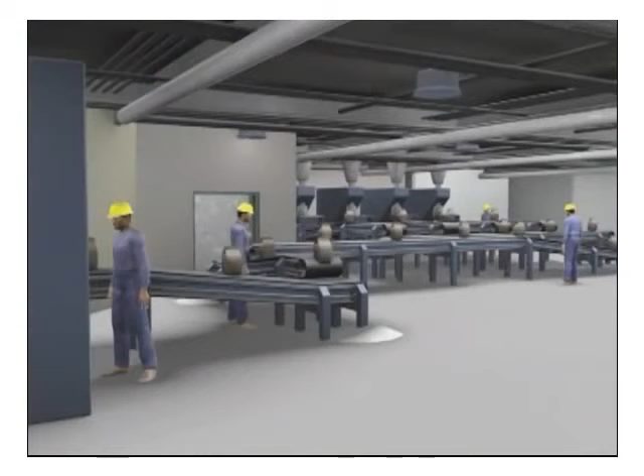Imperial Sugar's sprawling Port Wentworth complex began operations in 1917 and grew to become one of the largest sugar refining and packaging facilities in the U.S. Granulated sugar from the refinery was stored in 3 105-foot-tall silos and then conveyed into packing buildings where it was packaged for distribution. Granulated sugar was also converted into specialty products, such as brown sugar and powdered sugar.

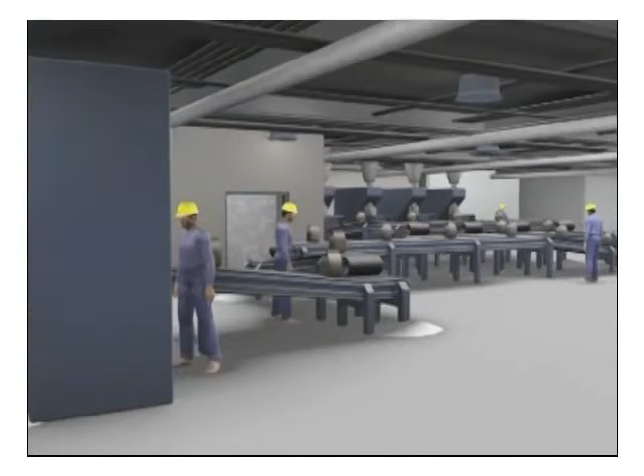Sugar was transported by a complex system of bucket elevators, screw conveyors, and conveyor belts. During this process, sugar spilled onto floors throughout the work area. In places, the spilled sugar was many inches deep. This sugar also contained fine particles which became airborne.

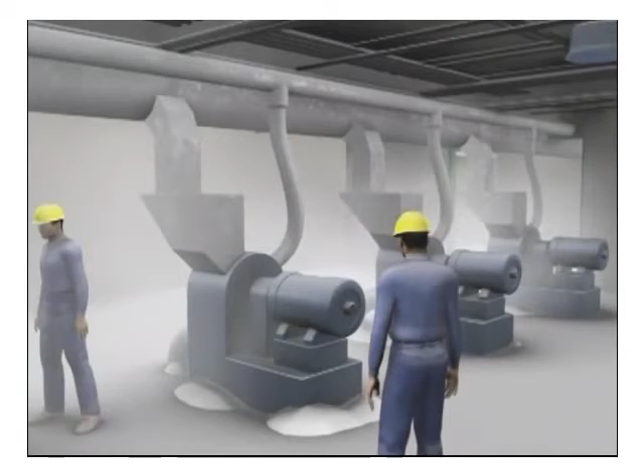In addition, hammer mills were used to crush the granulated sugar into powdered sugar, creating even more dust. The machines were connected to a dust collection system, but it was undersized and in disrepair, and it was not connected to the bucket elevators and conveyors.

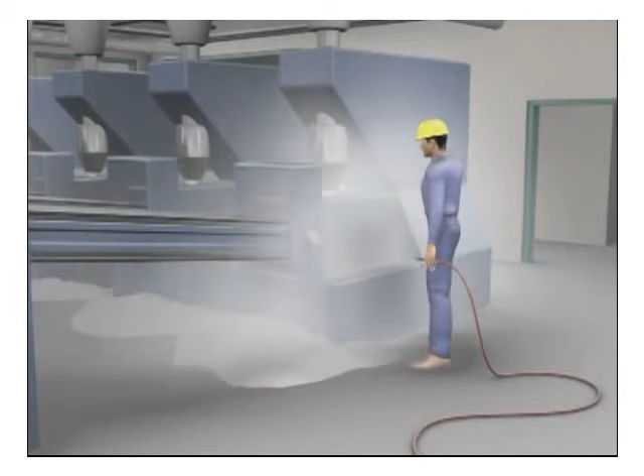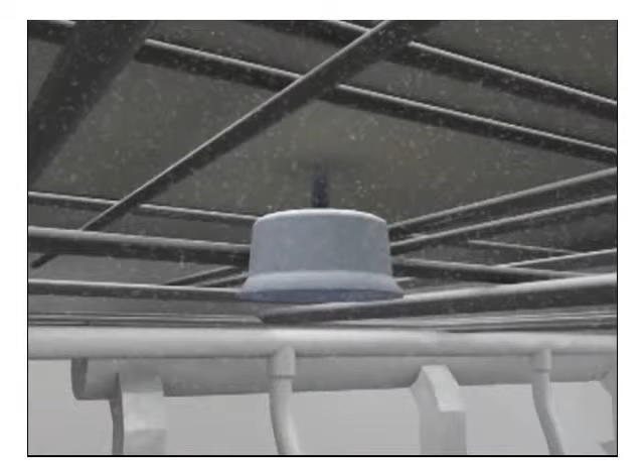Significant amounts of sugar dust escaped into the work areas. Workers routinely used compressed air to clean packaging machines, further dispersing sugar dust throughout the buildings. Over time, large amounts of dust accumulated on elevated, hard-to-clean surfaces, such as ducts, beams, and light fixtures. These surfaces were not cleaned often enough to always keep the dust below hazardous levels.

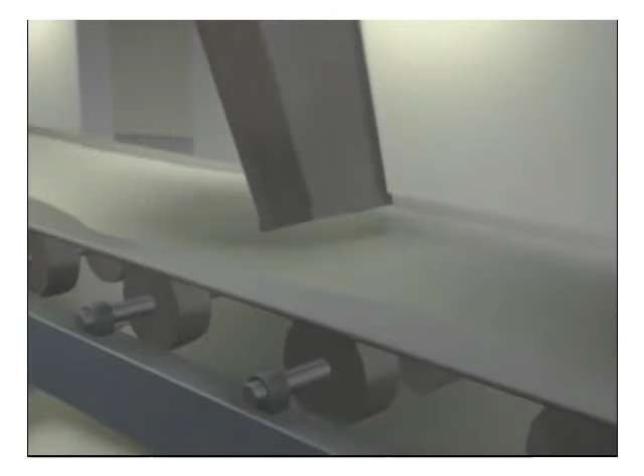In the tunnel beneath the sugar silos, granulated sugar flowed through chutes onto a long steel conveyor belt. From time to time, clumps of sugar would become stuck in one of the chutes, blocking the flow of sugar on the belt, spilling sugar onto the floor and releasing dust into the tunnel. But the tunnel was large and ventilated, so this airborne dust did not build up to explosive concentrations.

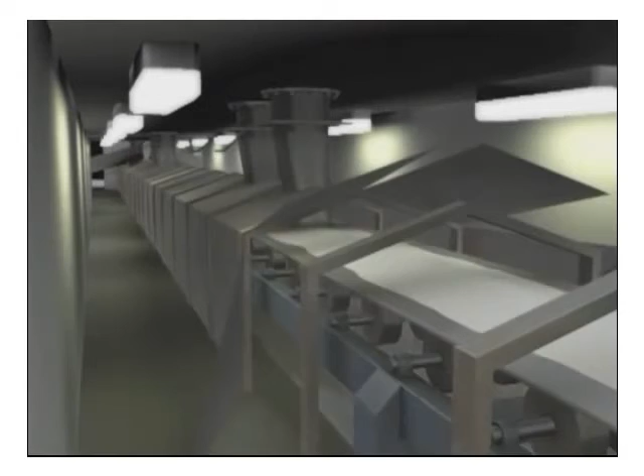However, in 2007, the company enclosed the conveyor belt with stainless steel panels to protect the sugar from possible contamination. The enclosure was not equipped with a dust collection system. As a consequence, sugar dust would now be trapped inside this enclosure.

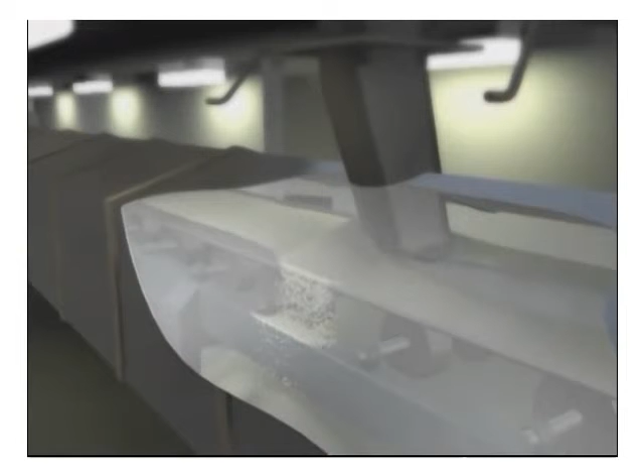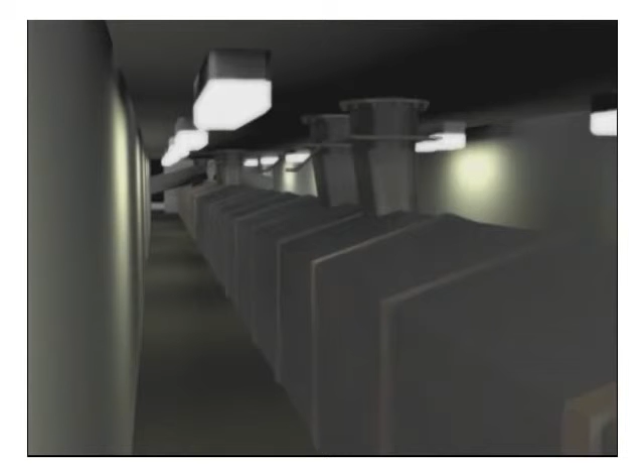On February 7, 2008, clumps of sugar were found blocking one of the discharge chutes. Sugar from the adjacent silo likely spilled off the moving belt. Dust likely accumulated to an explosive concentration inside the enclosure. At about 7:15 p.m., the sugar dust contacted a nearby ignition source, likely an overheated bearing, and exploded.

This primary explosion blew apart the enclosure and vented into the packing building. Accumulated sugar was lofted and ignited by the advancing fireballs. The dust clouds fueled a chain reaction of secondary explosions, which swept through the buildings. Concrete floors buckled, releasing tons of granulated and powdered sugar into the flames.

Emergency evacuation drills had not been conducted, and the explosions had cut the power to much of the interior lighting. In the maze of darkened and damaged stairwells and passageways, workers desperately tried to flee the growing inferno.

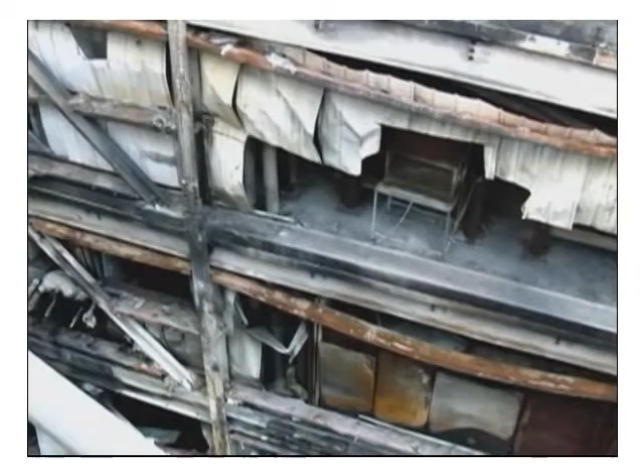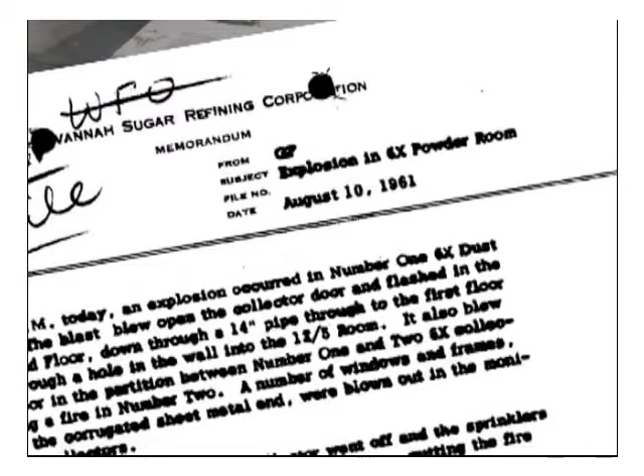The CSB found that correspondence dating back to the late 1950s showed that plant managers in Port Wentworth were aware of the explosive nature of sugar dust and the danger of dust accumulations. As far back as 1961, a memo described a sugar dust explosion that heavily damaged the powdered sugar mill room. Despite the long-standing awareness of the explosive nature of sugar dust, not enough was done to manage the hazard.

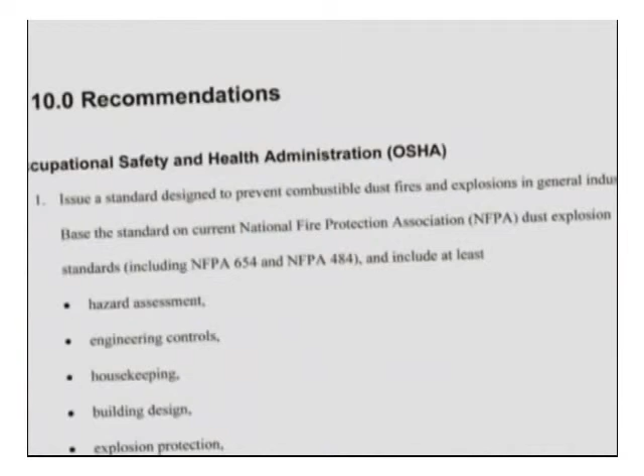In 2006, the CSB issued a study of combustible dust, which called on OSHA to establish a comprehensive combustible dust standard based on the current standards of the National Fire Protection Association, or NFPA.

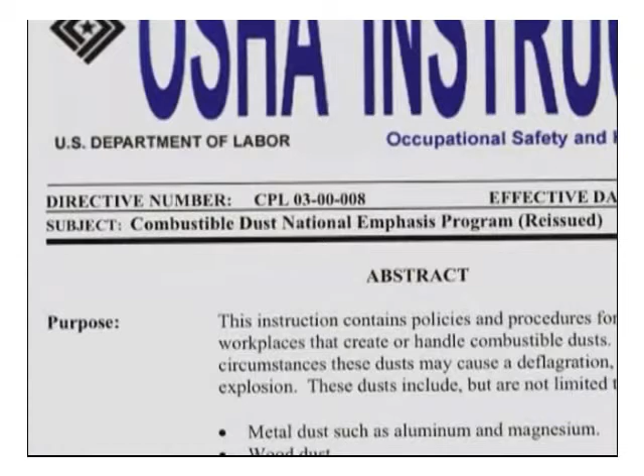In October 2007, OSHA began implementing a new national emphasis program to increase the enforcement of existing regulations related to combustible dust. Imperial Sugar learned of the OSHA Combustible Dust National Emphasis Program 4 months before the devastating explosion at Port Wentworth. But management did not act effectively to control the serious dust problem in the packing buildings.

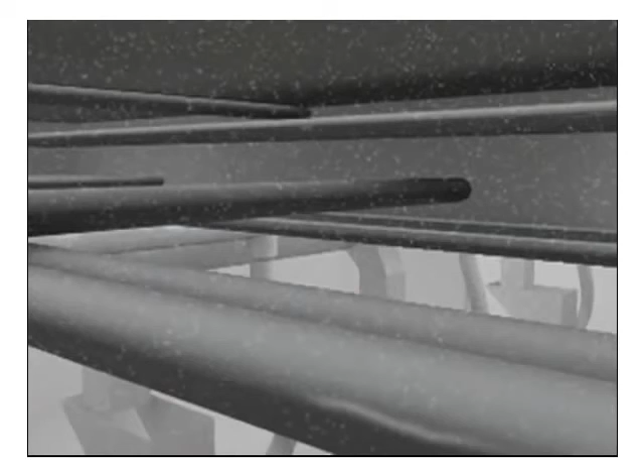Less than 2 months before the disaster, an internal inspection showed that many tons of sugar were still regularly spilling onto the floors. This provided much of the fuel for the massive secondary explosions and fires.

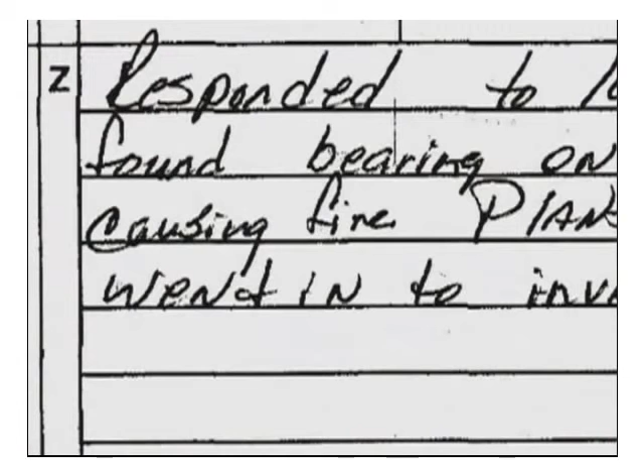The CSB found that over the years, the Port Wentworth facility periodically experienced small fires fueled by spilled sugar and accumulated dust on equipment. But none resulted in a sugar dust explosion that propagated through the plant. Investigators said that decades of operating without a catastrophic explosion may have lulled managers into complacency.

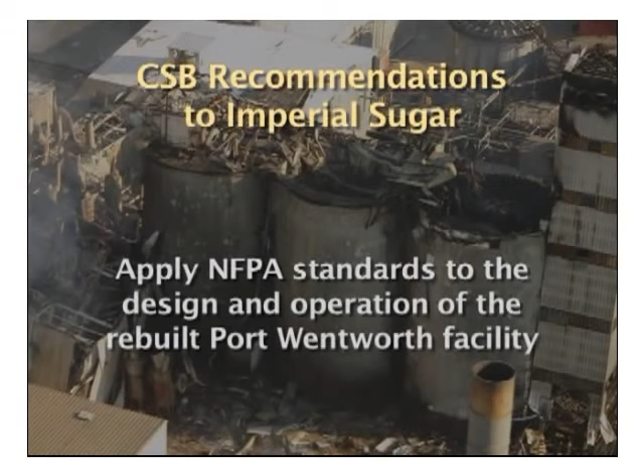In its report, the CSB issued the following recommendations to the Imperial Sugar Company: Apply NFPA standards to the design and operation of the rebuilt Port Wentworth facility. Develop and implement comprehensive combustible dust control, housekeeping, and training programs. Improve emergency evacuation policies and procedures.

Companies can go a long way to control combustible dust within their own facilities by following the existing recommendations of the National Fire Protection Association. But it is also time for a comprehensive federal standard on combustible dust.

In April 2009, OSHA announced plans to begin rulemaking on a combustible dust standard for general industry. In its final report on the Imperial Sugar accident, the CSB recommended that OSHA move forward expeditiously with the new standard. Without regulation, enforcement, and education, workers will continue to be at risk from catastrophic dust explosions.